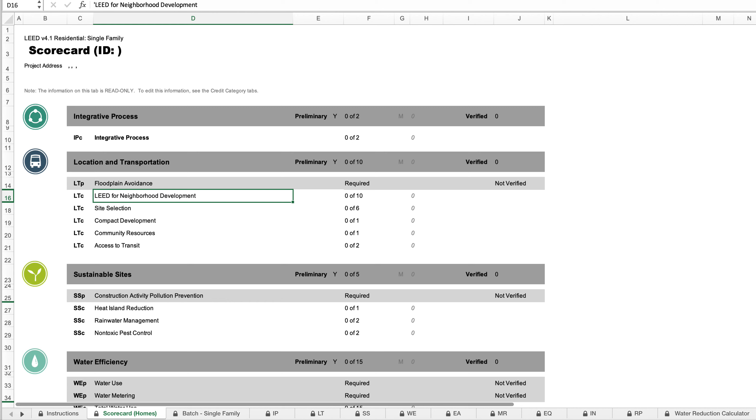Okay. All right, so let's go to the spreadsheet here. Move this into view. Okay, so this is the residential single family workbook that you can download from LEED. And I've zoomed out, and I'm going to zoom in now. If I can, whoops, sorry, I'm going to move this so I can zoom in. There we go. I have to access this. All right, so I'm going to zoom in. And it's a scorecard sheet that you can use in development of your project.

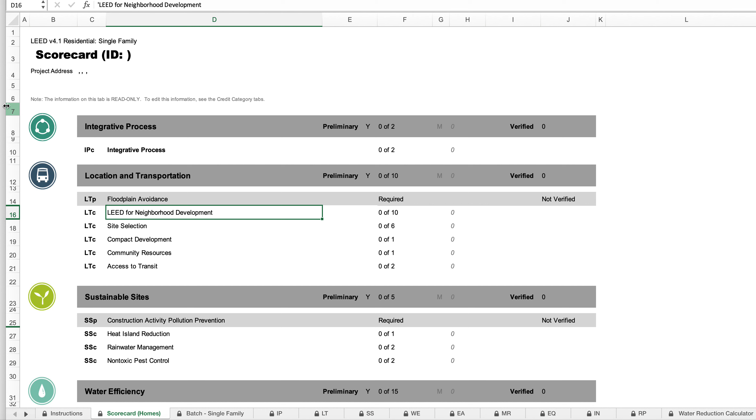And you see there are instructions. And this is where you would fill in all your data. And once you fill in your data, this will help you. Whoops, I just lost my spreadsheet there. Oh, I pulled on the wrong thing. Okay, so you would need to put in your information. And then this gives you a scorecard for the neighborhood. This is if you're in a neighborhood. And then this is a batch.

And so you're going to see this has different sheets for credits. And I have never filled one of these out. So I'm not going to tell you that it's an easy process looking at this. But, okay, so what happens is, I can tell you this. You see that this gives you an overall scorecard. And they are linked to, all right, so you see this says IP. That's linked to this page. So you would fill out this page.

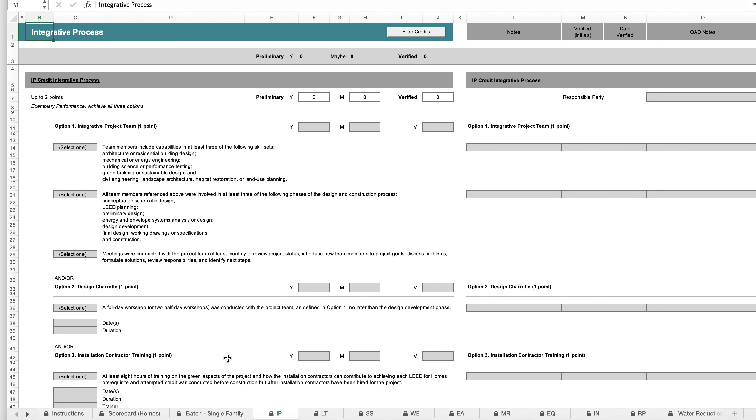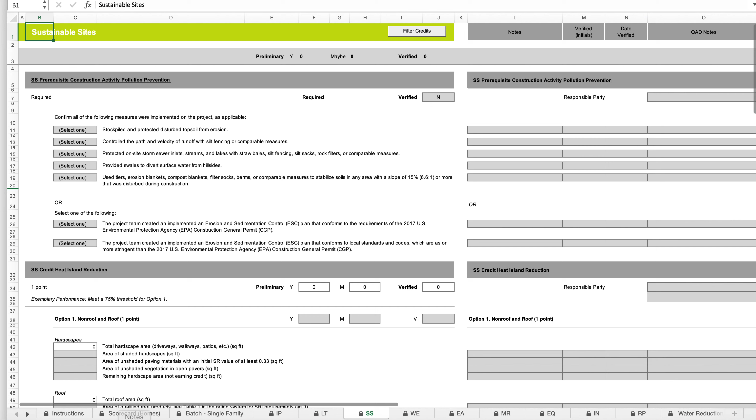Okay, so back to the scorecard. All right, so the next category is LT, and you just go to the LT tab. And so as you fill this out, like sensitive land protection, previously developed, right? You get points for what you can fill in on this. And it would be dependent on your project. So each one of these is linked back to the score sheet. And so you go through and you fill this out. And it fills this in and ends up telling you your overall score.

And so here's the thing. You can get silver, gold, or platinum. Those are the 3 classifications, and it depends on your points. Now, you would obviously have to go through and fill this out honestly to know what your score is. To actually get the LEED classification, you would have to go through the certification process. You would have to submit for certification, and then a team would evaluate your project. And they might not agree with you on everything, so I would recommend being a little conservative to err on the side of the fact that they might be more strict.

And so this worksheet, which will be uploaded into the course, will allow you to just take a look at it a little bit, go back and forth, type in some numbers and see how it starts to add up. And so you can start to see how hard it actually is to meet these numbers, unless you start your career with the mindset of trying to be green and sustainable. And then this becomes easy and natural, and your buildings start getting certified for silver, gold, and platinum status. And that's a huge thing to be able to use as a selling point for your company or your services to your clients who are looking for that.

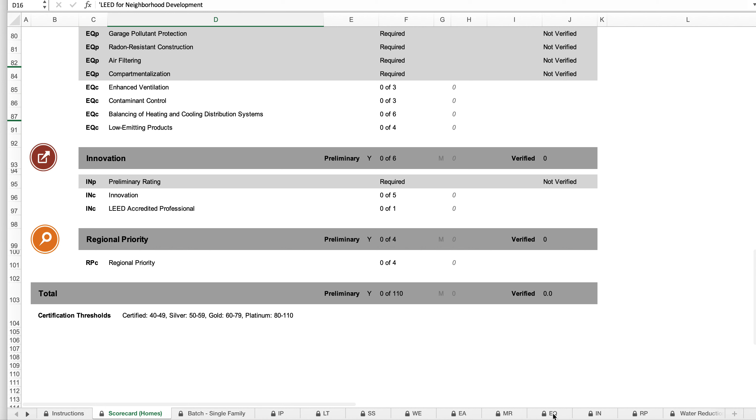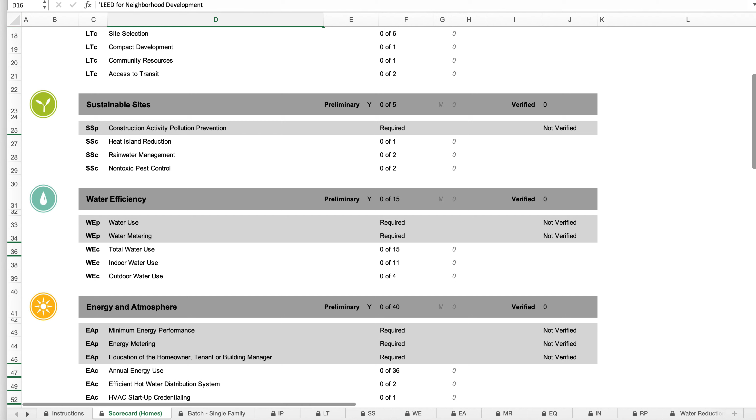And so all these tabs just link back to, let me zoom out more. And just so you can see, there's quite a bit. And as always, the more you fill these out and the more familiar you become with the process, the more you can start thinking about it. And so what you could do is use this in the beginning, right? When you're working on designing a building, know that these are the things you should strive for. This sheet helps tell you what they are, the things that you should be thinking about.

For instance, total water use. Well, okay, that's something that's going to get me points in LEED, so it's something I should start considering in my design process when I'm picking my water fixtures. And you guys are going to take a class in that at the end of your degree that will talk more about how to know.

In the county I live in, you are required. I was told at the time by my inspector that DeKalb County, Georgia, is the only county in the country, and it was at the time, he said. I didn't verify, and I know it's probably not anymore. You can't complete your purchase of a property without a certification that it has low water usage fixtures. And my husband and I joke that sometimes you have to flush the toilet twice because the low water doesn't always get the toilet to flush fully. So we're not sure it really is low usage, but you get credit for that. And then there's even these great calculators you can use.